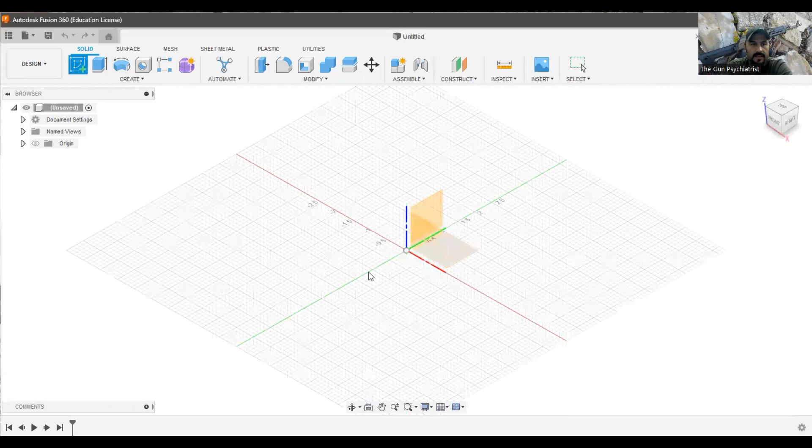So let's go ahead and make an extrusion. We're going to make a diameter. Let's call this 0.5. Okay. In a sketch, we're going to extrude it. Let's go up 6.5 inches. Here, we're going to make another extrusion.

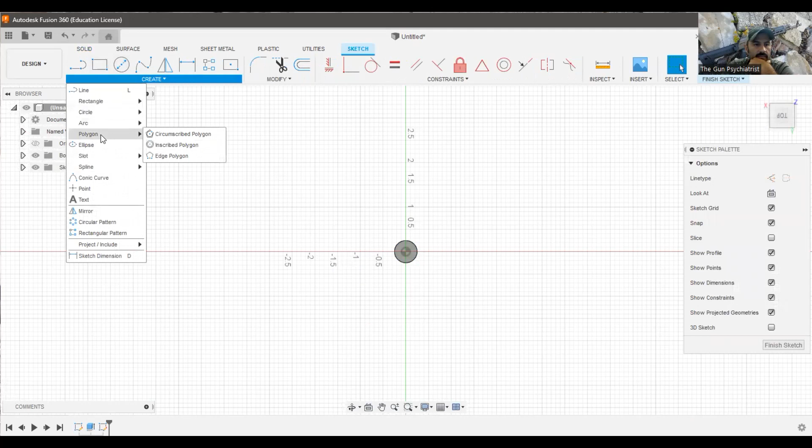First, we need to start with a polygon. I know it's not necessarily a polygon, but call that 0.5. Go like this. We're going to add a circle in here. I think we add it right here on the top of this bolt head. We're going to extrude this up, this and this. We're going to go up 0.325.

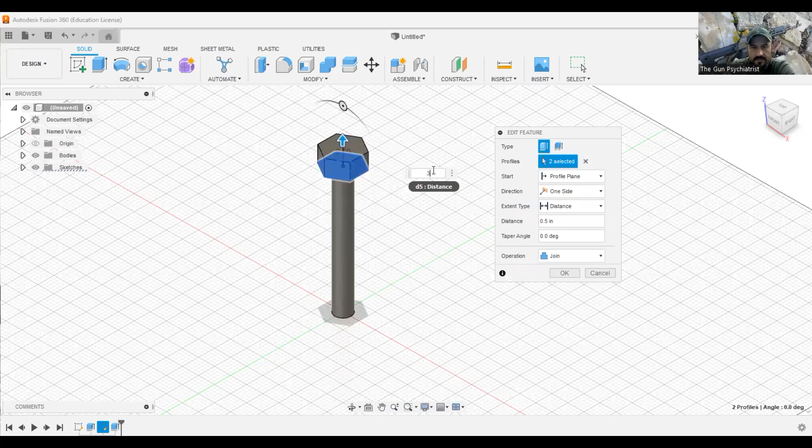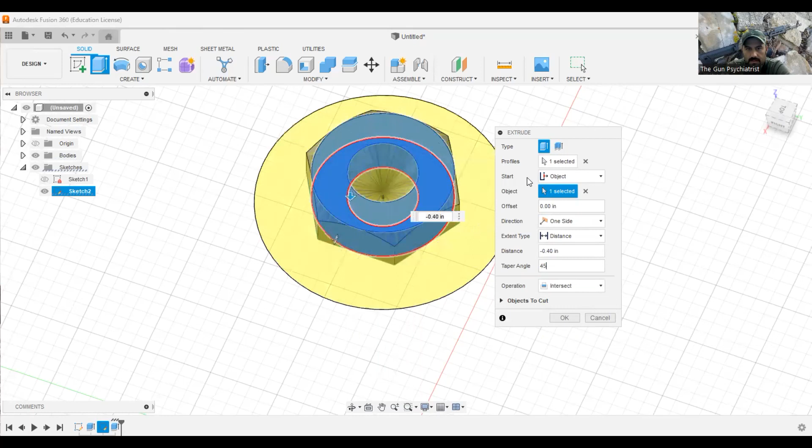Now we need to extrude, and we want to go ahead and grab this here. And we're going to go from object, click on this, and we're going to do an intersection. Let's call that 60 degrees. No, let's go to 30. Okay, that's better. 35? Yeah, I like 35.

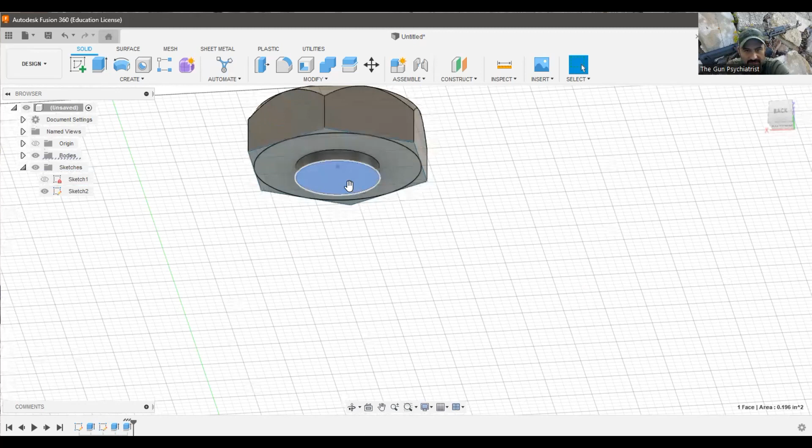Let's just go ahead and extrude this down. I did something backwards here, but just in the interest of time, let's call that 4 inches. I'll just re-extrude that back. Okay, so we have a bolt.

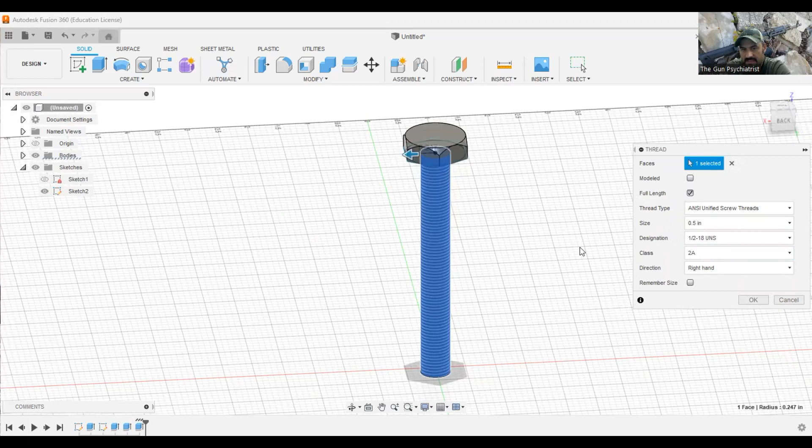Now, what we're going to do is we're going to take these threads right here, and we're going to click on that. 1/2 inch, 1/2 by 12. Let's call it 1/2 by 18. We can adjust it, it automatically picked up our thread size, and we're going to do modeled.

And that's it. And then we want to create a chamfer right here, 0.0625. Okay. Now let's do it. Okay, that's much better. So that was a thread feature in Fusion 360.